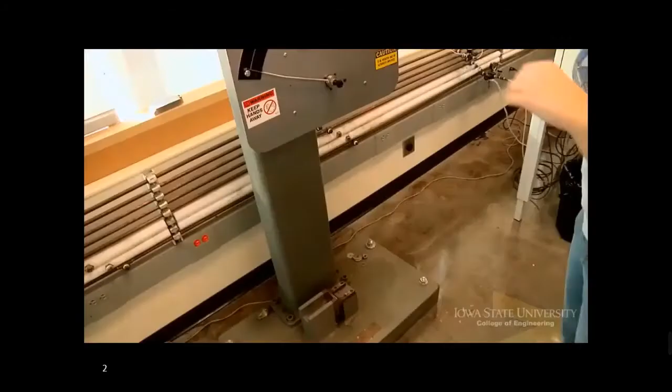Everything in the world is made up of materials, right? And those materials, what we see macroscopically, like a piece of steel, just looks like one hunk of steel to us, but actually there's a bunch of little particles that it's made up of, and how those are arranged changes how strong the steel is, how easy it can bend when it melts and things like that. So material science and engineering is actually controlling that so that we can change how strong the steel is or anything. We also do polymers and plastics, ceramics, and electronic materials also. Using science and engineering to make everything better in our world. We can look at a failure of a piece and determine why it failed, how it failed, if a similar piece that's in use will fail.

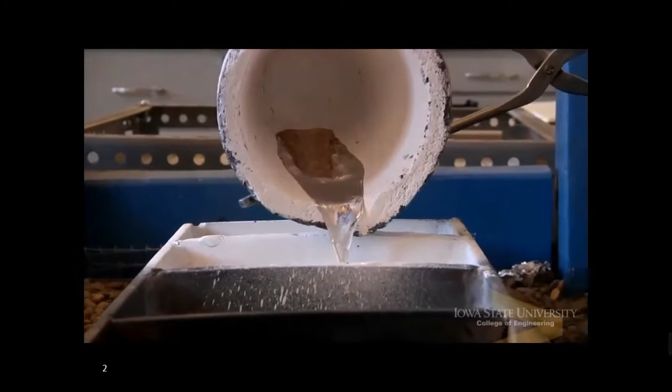The more efficient we can make batteries, it'll help consumers a lot. We need things that are more efficient with energy, we need things that are recyclable, or even such things as being tougher, stronger, more resistant to corrosion, environmental things. So it can span pretty much all spectrums of industry out there in the world. We have higher demand for electronic components that need to be smaller and lighter. So you need to come up with new materials that can handle such capacities. There's only a certain amount of different elements in the earth, and a lot of things that we use to make things like TVs and electronics and things like that are limited. So if we can figure out how to recycle them and reuse that, it'll be more cost effective.

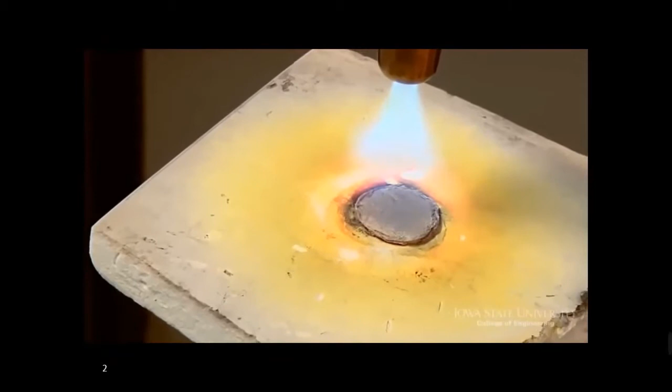Another realm of materials that's going to, I think, be on the rise in the future is going to be multifunctional materials. Life cycle, the whole system. What's going to happen to this in the end? Things like plastics and stuff, a lot of people are worried about landfills and things like that they don't break down very well. So there's people working on polymers that are made out of biomaterials like corn and potatoes and things like that will actually biodegrade. I feel like I have so many options to choose from and so many different areas I could go to. To make technology greener and as well keeping it friendly enough for everybody to still want to use in everyday applications and not make it a big hassle for everybody to become a green society.

Ames Lab is located on the edge of campus and it allows a lot of students to have research positions with professors or scientists to allow them also the opportunity. The visit I had to Iowa State sold me. The department up here is one of the most up-to-date, I think, advanced laboratories we have for materials engineering, and then the community we have, the access we have to professors and research and things, is just an opportunity you can't pass up.

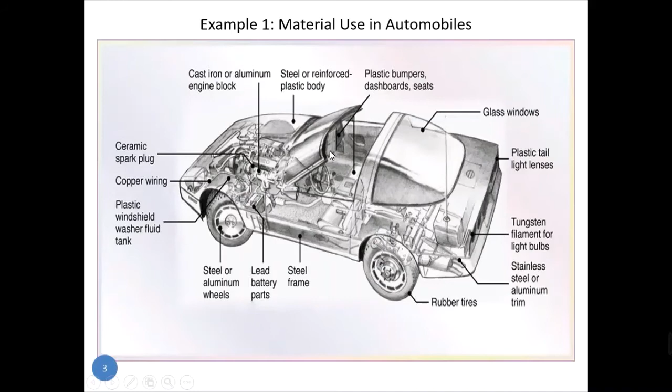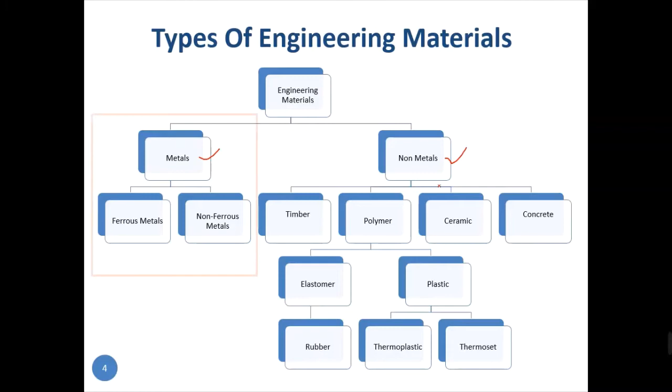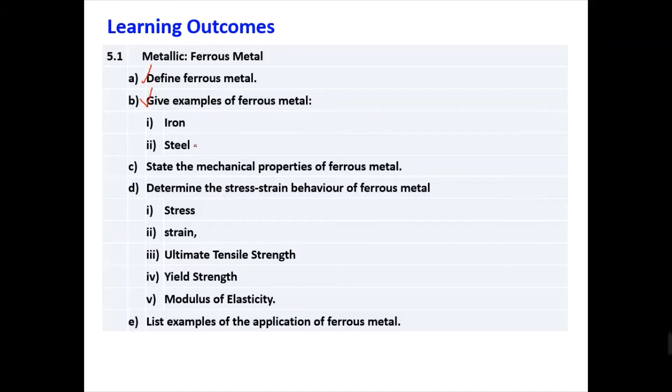Now imagine that you are appointed by your employer to design and build a smartphone with minimal production costs and resources, and that smartphone needs to be sold in the market within 6 months. How would you respond to this situation? Quite tough, isn't it? And that is why we need to study materials so that we can select the right materials for the right product, right?

Take a look at ferrous metal. Now, ferrous metals are defined as material with iron element as the base metal. Okay, iron. The properties of ferrous metals may be changed by adding various alloying elements such as nickel or molybdenum and so on, in order to alter the properties.

Products of ferrous metal such as plates, bars and sheets can be found in many products. So examples of ferrous metals are steel and iron. Okay, steel and its alloys and iron with its variations are among the common ferrous metals used in the engineering field.

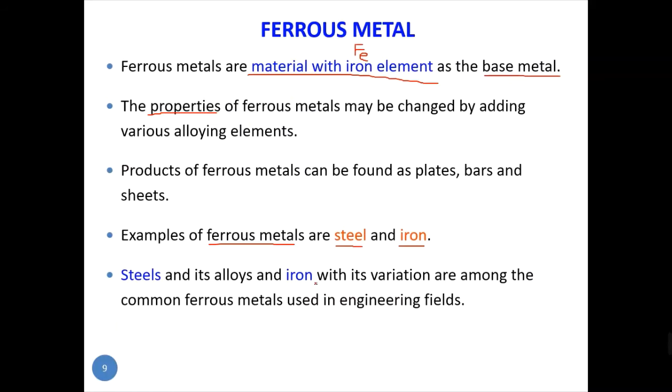Now, in general, these are some of the properties possessed by ferrous metal. As you can see here, the general properties of ferrous metal: durable, great tensile strength, usually magnetic, low corrosion resistance, can be recycled, and good conductors of electricity.

Now these distinguished qualities make ferrous metal usable in building constructions as well as in making tools such as hardworking tools, vehicle engines, pipelines, containers and so on.

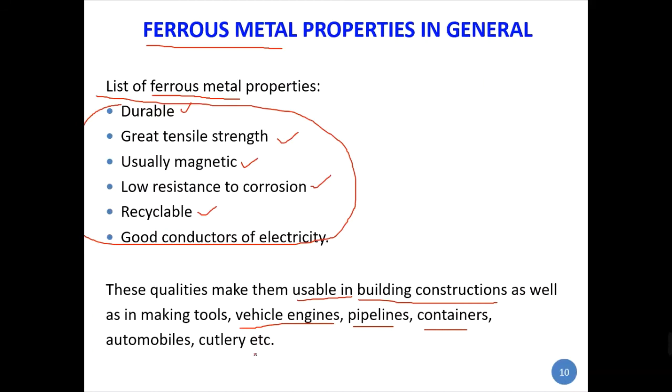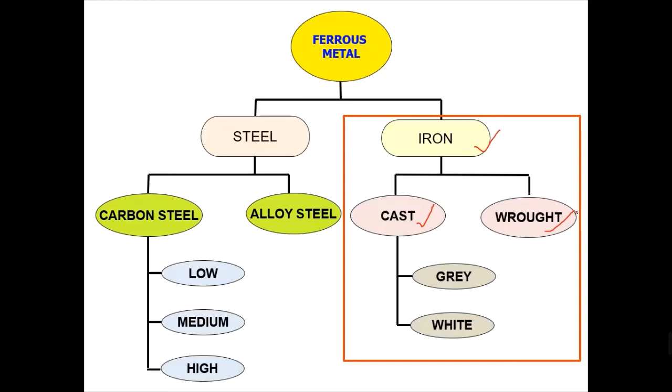Okay, in this part of the presentation we will focus on iron and its types before we move on to steel on a later slide. Now iron can be categorized into two types, which are cast iron and wrought iron. Before I explain further on cast iron and wrought iron, here is a brief overview of iron itself.

Iron is the basic constituent of steel. The main ingredient of steel is iron. Iron is actually the most abundant metallic mineral in Earth's crust after aluminium. It can be found in the form of ores as oxides, carbonates, silicates, and sulfides. Now, in order to produce iron, we need special equipment such as blast furnaces.

Carbon exerts the most significant effects on the microstructures and properties of iron products. We take a look at these carbon properties and what will happen to the iron when we mix in carbon. An increase in the amount of carbon will decrease the melting point of the iron. Now the term exert here is the influence factor. Whether the steel is ductile, hard or tough depends on the carbon content.

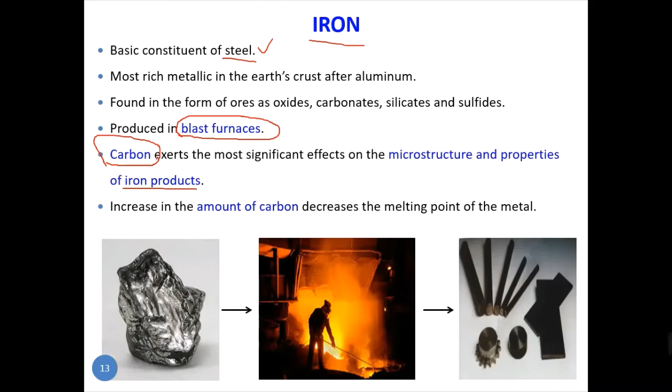Now, before we conclude today's lesson, take a look at this video explaining the process of iron making in a blast furnace and what conclusion we can draw from the video.

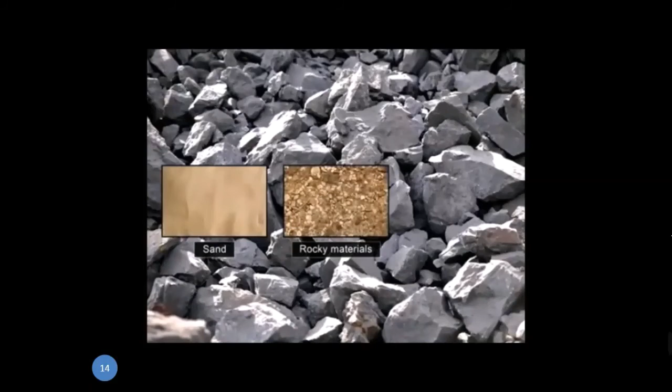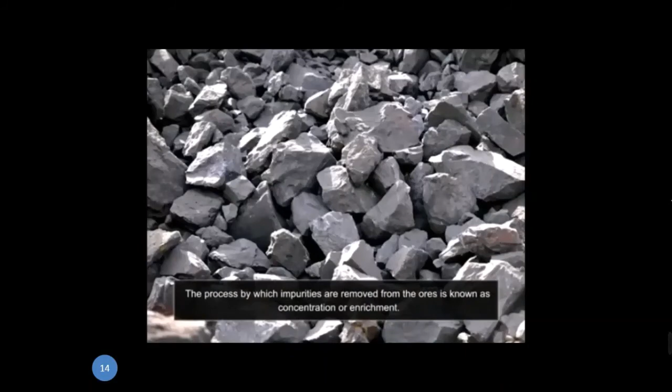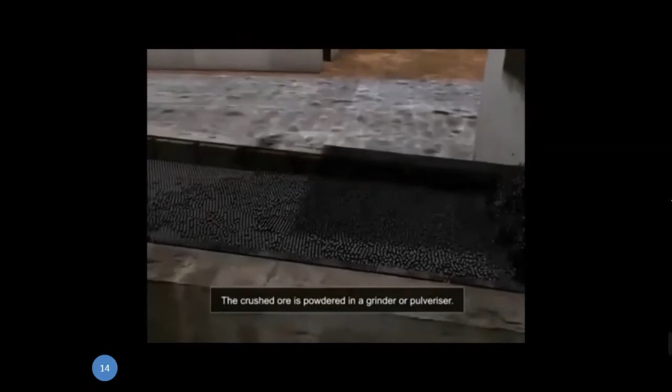Iron ore mined from the Earth's crust contains impurities such as sand, rocky materials, limestone, etc. The impurities are collectively known as gangue. The gangue must be removed before the metal can be extracted. The process by which impurities are removed from the ores is known as concentration or enrichment. To begin with, the ore is crushed into small pieces in a crusher. The crushed ore is then powdered in a grinder or pulverizer. The powdered ore is then washed in a current of water to remove impurities. The heavier ore particles settle down while the lighter impurities are washed away with the water.

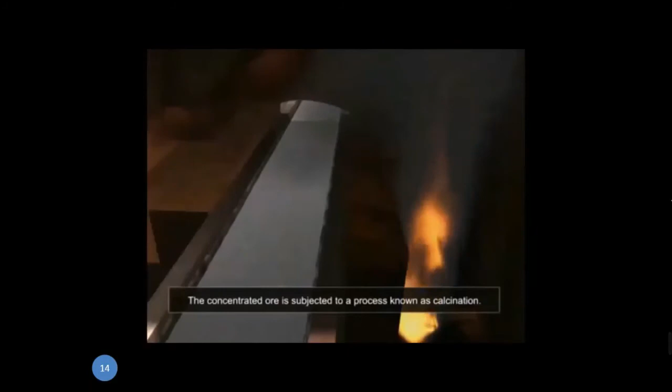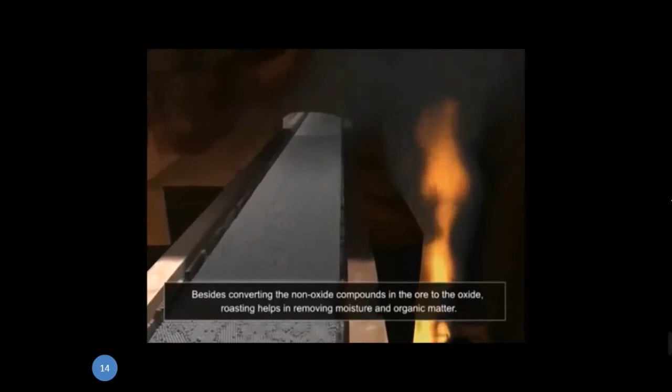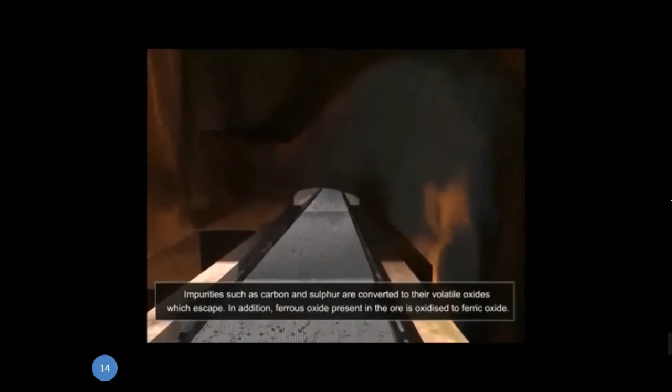The concentrated ore is then subjected to a process known as calcination. The ore is heated strongly in the presence of air in a reverberatory furnace. Besides converting the non-oxide compounds in the ore to the oxide, roasting helps in removing moisture and organic matter. Impurities such as carbon and sulfur are converted to their volatile oxides which escape. In addition, ferrous oxide present in the ore is oxidized to ferric oxide. Let us now see how iron is extracted from the roasted iron ore.

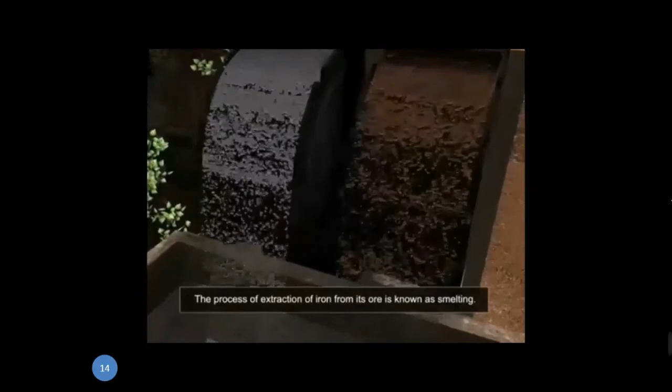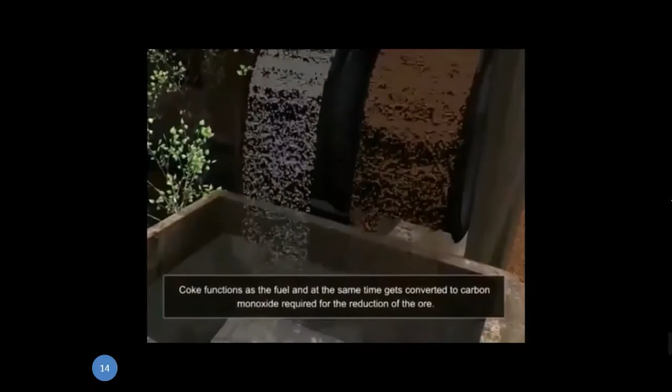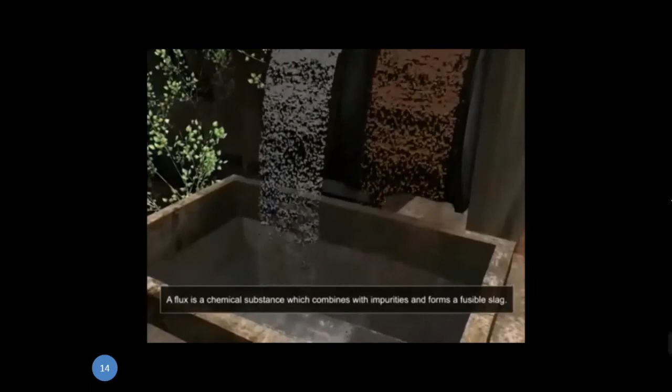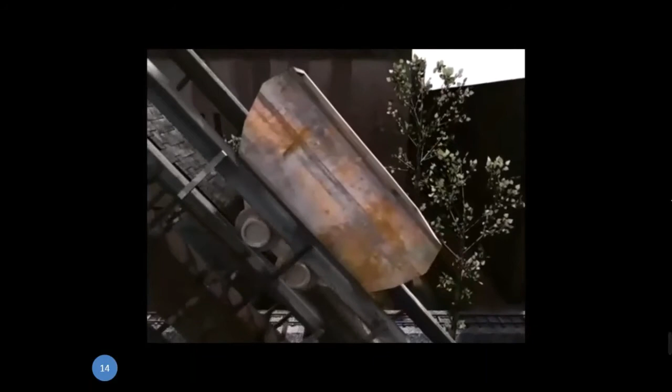The process of extraction of iron from its ore is known as smelting. The roasted ore is mixed with coke and limestone. What roles do coke and limestone play? Coke functions as the fuel, and at the same time gets converted to carbon monoxide required for the reduction of the ore. The limestone acts as a flux. A flux is a chemical substance which combines with impurities and forms a fusible slag. The charge is brought by trolleys or skip cars over a conveyor system and introduced into the blast furnace through the cup and cone arrangement.

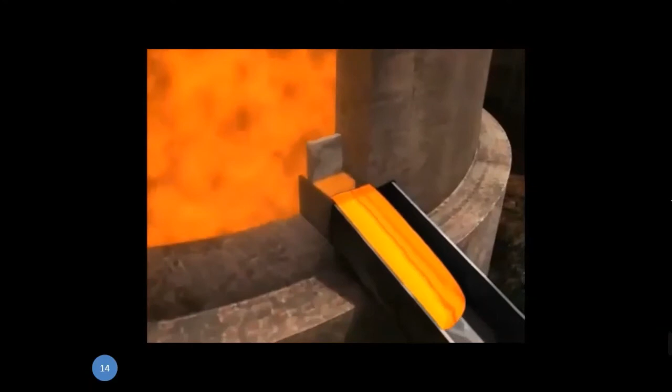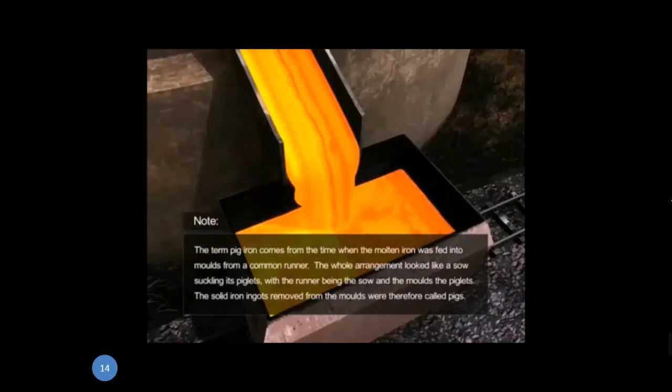The molten iron collects at the bottom of the furnace and is tapped periodically. It is poured into sand molds and allowed to cool and solidify. The iron obtained from a blast furnace is brittle and is called pig iron. Note, the term pig iron comes from the time when the molten iron was fed into molds from a common runner. The whole arrangement looked like a sow suckling its piglets, with the runner being the sow and the molds the piglets. The solid iron ingots removed from the molds were therefore called pigs.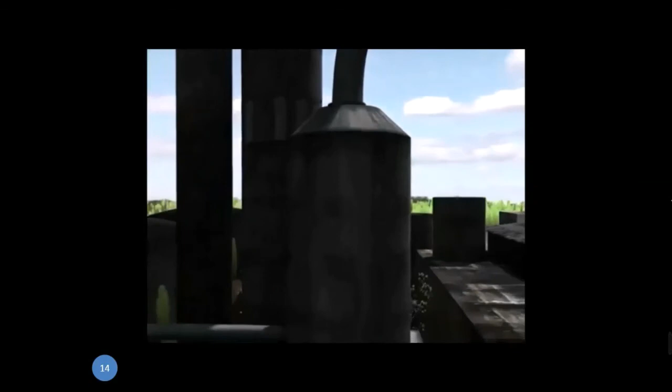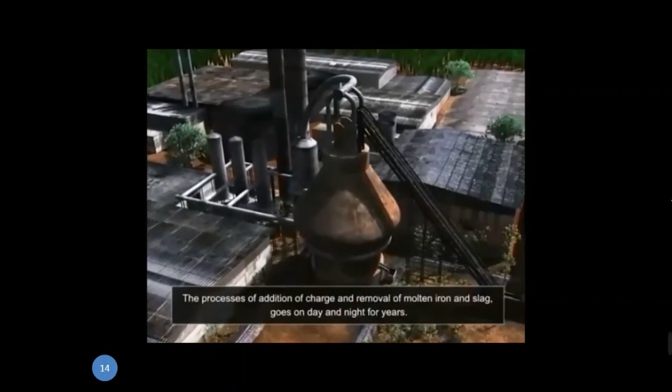The unused carbon monoxide along with nitrogen from the hot air and carbon dioxide pass through the outlet at the top and enter the dust catcher which removes dust and other particulates. The dust-free gaseous mixture is burnt in special burners and the heat produced is used to heat the air that is blown into the furnace. The processes of addition of charge and removal of molten iron and slag go on day and night for years. The blast furnace is shut down only when the fire brick gets worn away and needs to be replaced.